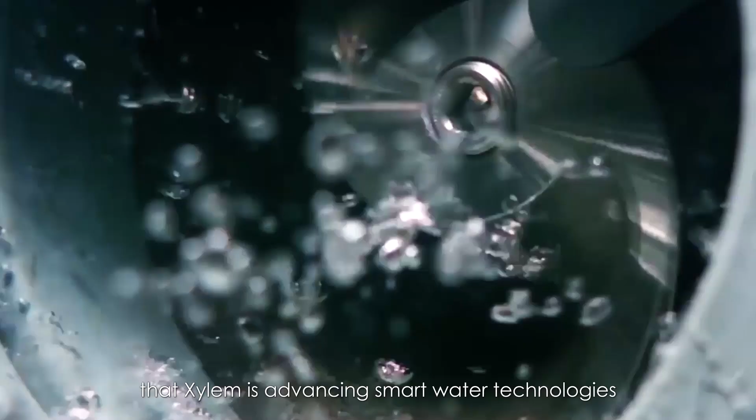As you may have learned from previous digital meetups with Xylem colleagues in other parts of the globe, Xylem is advancing smart water technologies and digital solutions around the world. In China, we have built that into our growth strategy, and we are building local capabilities to help our customers solving water problems through digital transformation and smart water management technology.

To provide customized solutions locally, we have also established an intelligent decision support center in Nanjing. The themes that we mainly focus on in China are water scarcity, the affordability of water, and resilience.

Water scarcity is a big issue in China, especially when China is deepening its urbanization. It has an impact on economic development and people's well-being. With roughly 1/5 of global population residing in China, providing safe drinking water to over 1.4 billion people remains a challenge. About 110 cities in China suffer from water shortage due to different reasons. It is becoming one of the most challenging issues that hinder China's sustainable development.

The second issue is the affordability of water. Many utilities in lower-tier cities don't have the adequate funding to invest in new water infrastructure, which is traditionally very expensive. While aging water infrastructures will impact water quality, which conversely intensifies the water scarcity.

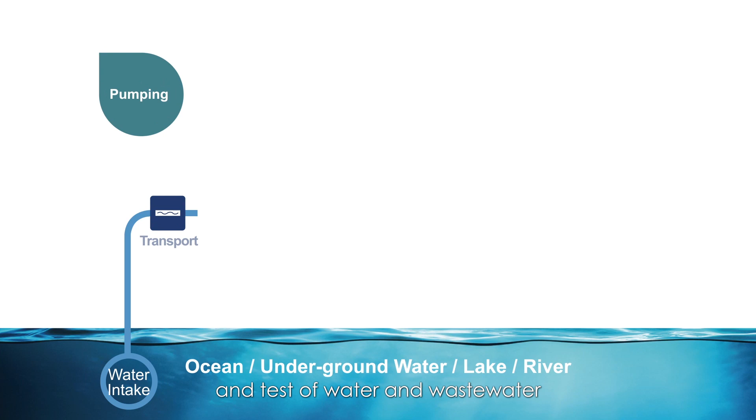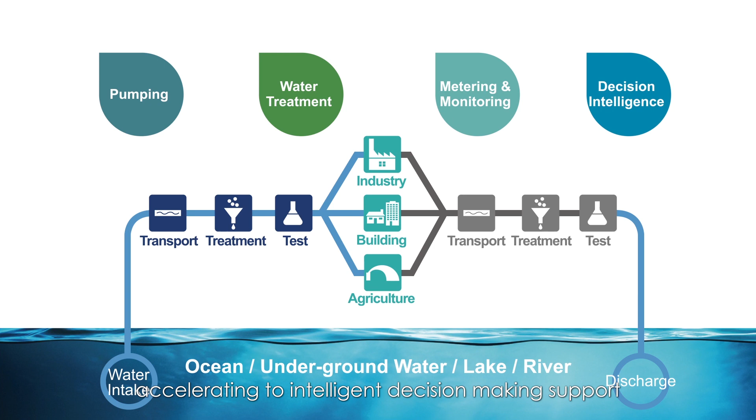Xylem's solutions serve the whole water cycle, from transport, treatment, and test water and wastewater to water application in industrial, commercial, and residential buildings, and in agriculture. Accelerating to intelligent decision-making support for water utilities intended to help utility agencies spend less by making existing infrastructure smarter and more efficient.

Let's welcome Henry Yuan, our sales leader of Advanced Infrastructure Analytics. He will bring us to the newly established Intelligent Decision Support Center in Nanjing and introduce Xylem's smart water technology and our best practices in China.

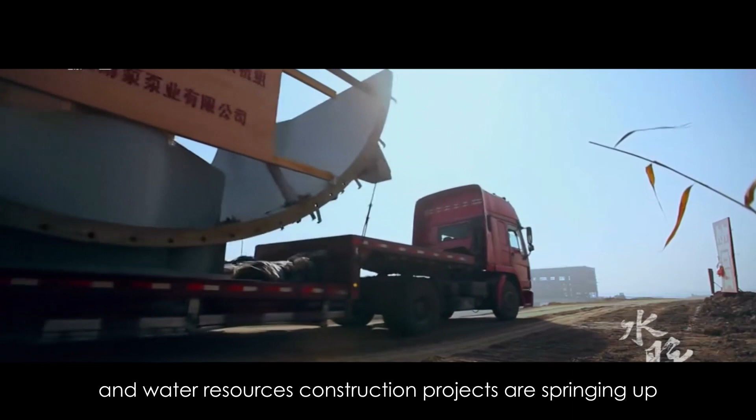China has a vast territory and uneven distribution of water resources. However, with the continuous improvement of urban living standards, the requirement for safe water is increasing. To fulfill the requirement, many super projects, like cross-regional water transport projects and water resources construction projects, are springing up.

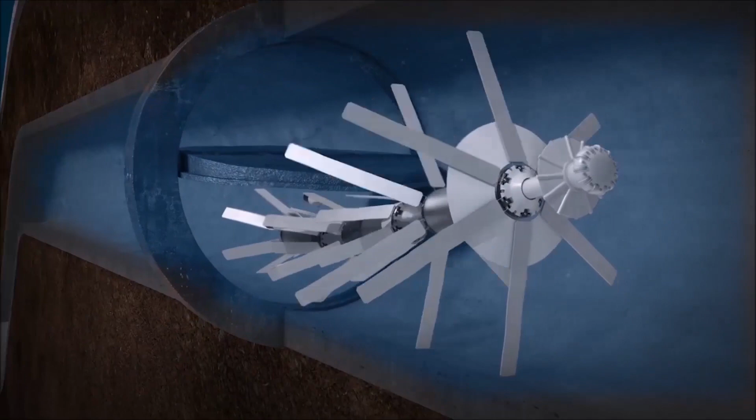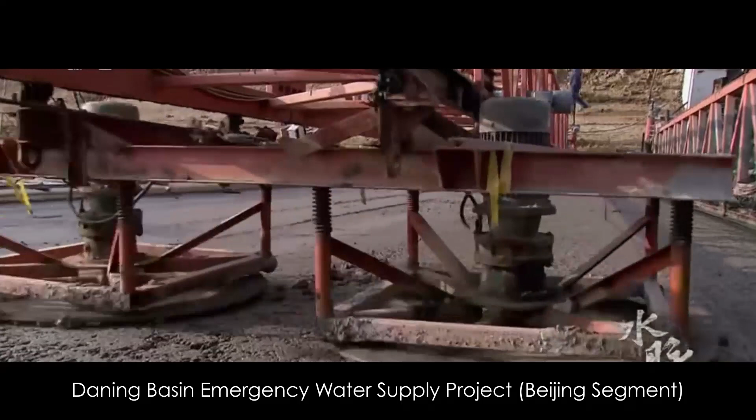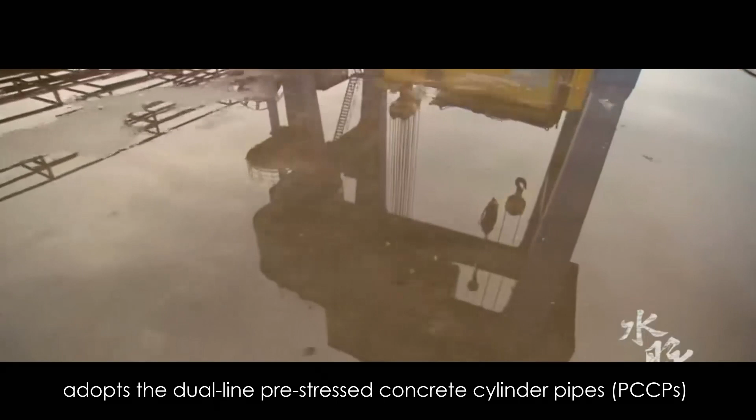The Huinanzhuang Pumping Station, Daning Basin Emergency Water Supply Project, which is located at the Beijing-Shijiazhuang segment of the middle route of the South to North Water Transfer Project, adopts dual-line pre-stressed concrete cylinder pipes of 4-meter diameter with total length of 112 kilometers. Since water transmission started in September 2008, the South to North middle line has already transmitted 4.3 billion cubic meters of water to Beijing.

In 2015, Xylem installed the Xylem Soundprint AFO PCCP wire break safety pre-alarm monitoring system at the tail end of the right loop of the works, which is used to continuously monitor wire breaks in the PCCP, because flow increased to 2.4 meters per second to meet large water demand. The client could receive monitoring results remotely and take countermeasures proactively.

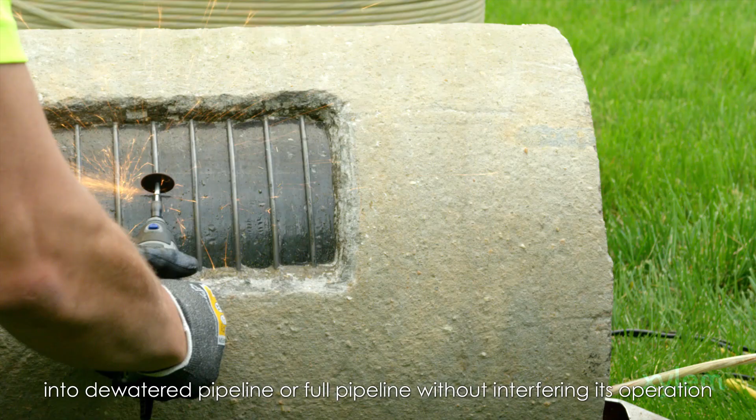SoundPrint AFO system could be installed into dewatered pipeline or full pipeline without interfering its operation. Cables installed in the PCCP could collect real-time data and grasp changes in different operation conditions, then transmit acoustic event to the DAQ.

Those collected data will be filtered and transmitted to the monitoring platform if it is a suspected pipe break. Data analysts could remotely analyze monitoring data with in-field system independently. Based on the monitoring results, our customer could understand PCCP conditions in different phases or formulate maintenance plans for repairing

and replacing pipe. With further investigation on the PCCP condition and AFO results, Xylem's intelligent solution could offer customers data-driven advice on important infrastructure management, securing stable and safe operation of such significant works.

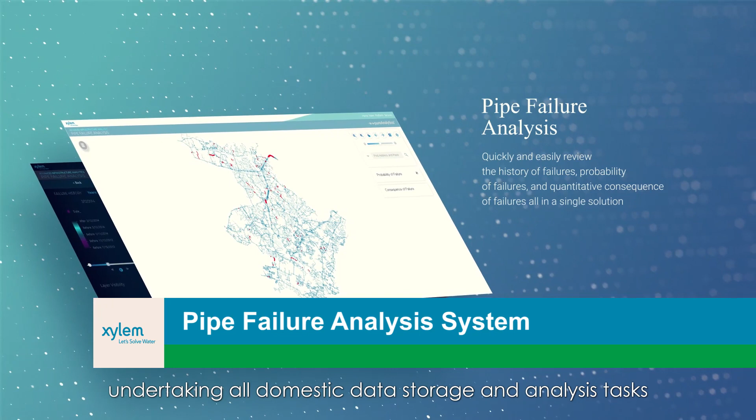In Nanjing, we set up Xylem Intelligent Decision Support Center, which will support the development of Xylem's intelligent decision solution in China by establishing a data storage and analysis platform, undertaking all domestic data storage and analysis tasks, and realizing the monitoring and optimization of pipe network and water assets.

If any of you come to China in the future, welcome to visit our Nanjing Intelligence Center.

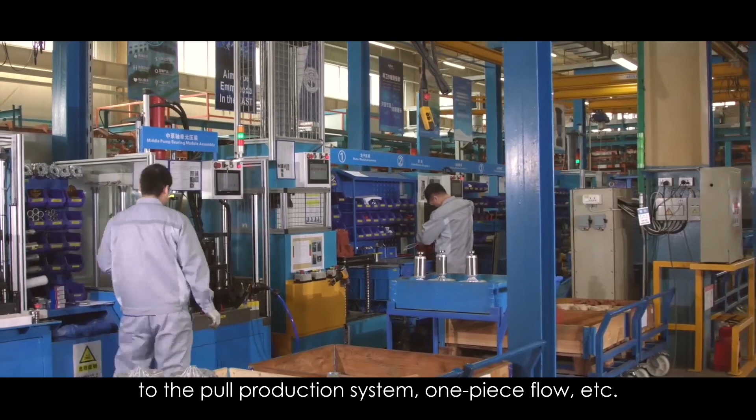As the world's leading water technology supplier, Xylem is committed to water protection and reclamation, implementing the philosophy of every drop counts with innovative water technology solutions.

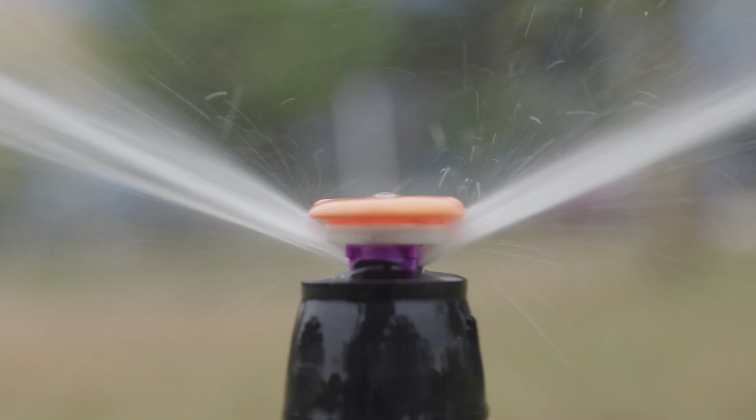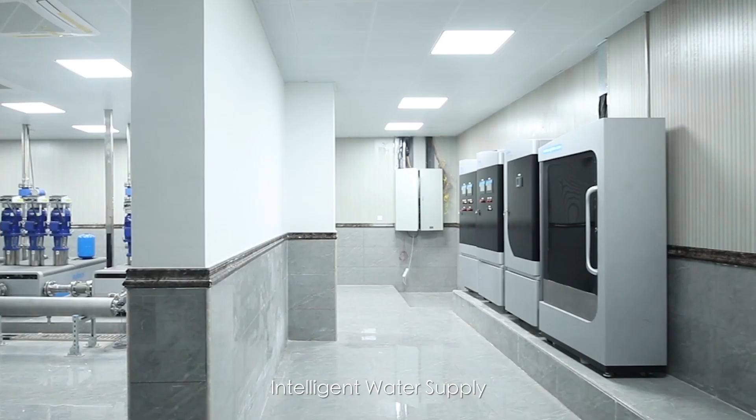The construction of the omnidirectional self-supply water circulation system made undeniable contributions to Nanjing Garden Factory. The system combined with access control and security protection, video surveillance, intelligent water supply and remote control, integrated intelligent pump house, along with various sophisticated equipment of Xylem, secures the safety of clean water for the community.

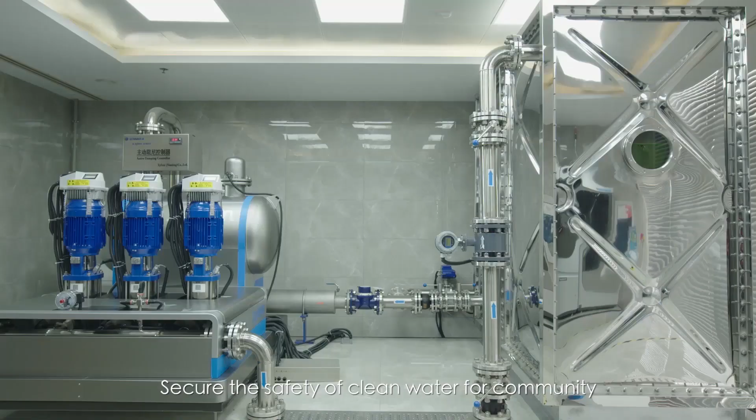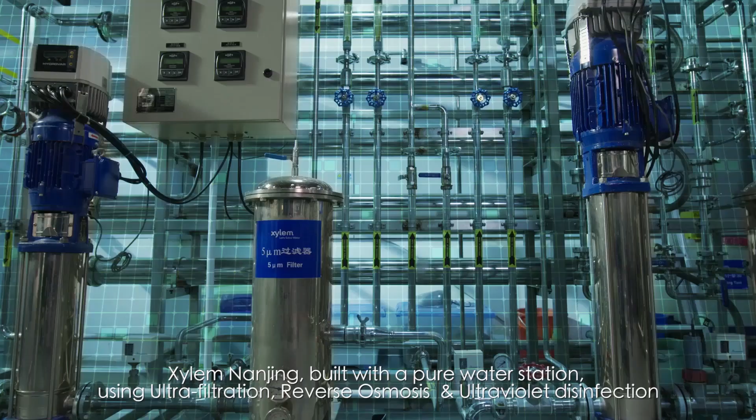Xylem Nanjing built a pure water station using ultrafiltration, reverse osmosis, and ultraviolet disinfection, ensuring everyone here has access to safe and clean water. With continuous exploration and proactive innovation, employees of Xylem Nanjing approach new targets on the way to intelligent manufacturing and sustainability.

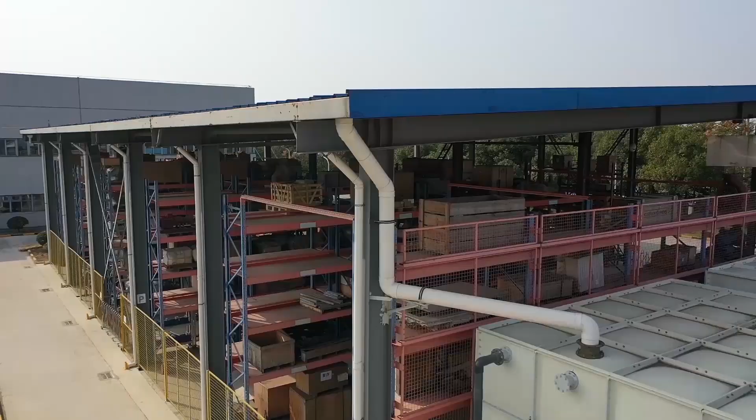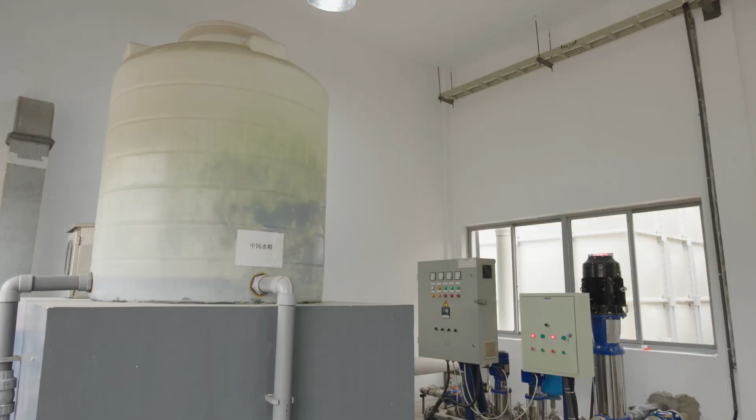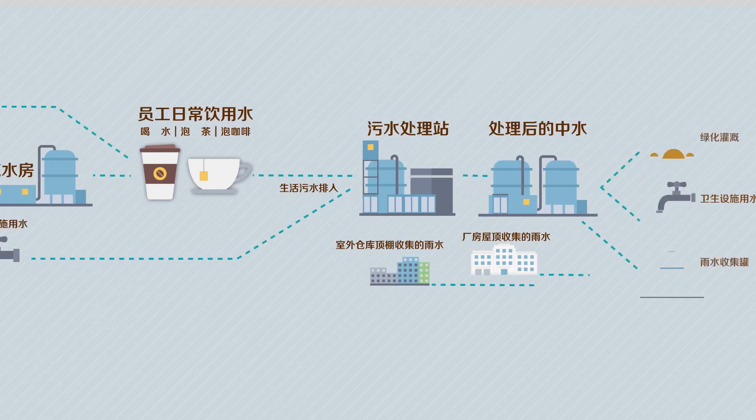Rainwater collection for irrigation. Sewage treatment for water recycling. Water circulation is used throughout Xylem Nanjing.

Facing the world's water scarcity, Nanjing plant starts from herself. Never forget why we start, and move forward bravely.

Watermark activities are carried out everywhere - in schools, in scenic spots, in parks, in our plants - everywhere with our environmental footprints. Water, origin of Xylem dreams, touches the heart of our purpose. We believe Drive to Green is a good choice in Xylem Nanjing for our commitment to the world.

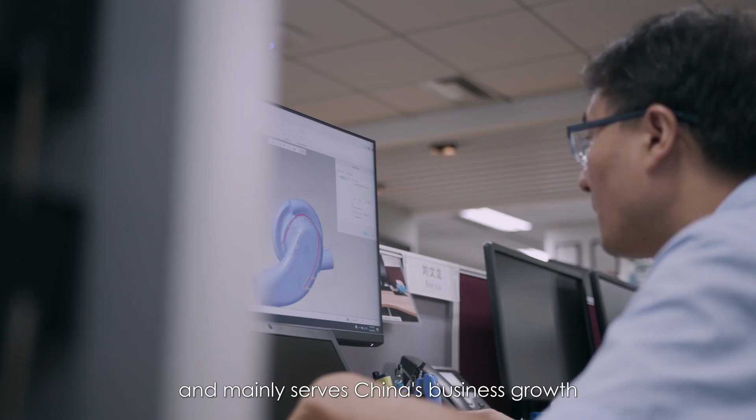Our RDE Center is rooted in China and mainly serves China's business growth. It cooperates more closely with the local market and sales. Its main functions include

new product development for the local market, introduction and localization of new products from other GCs, enhancing competitiveness and capability of local products through value engineering, execution of water treatment projects including design, drawing, and field commissioning, controlling new product development processes, managing product safety and local patents, and providing technical support for customized orders and quality issues.

After several years of development, we now have more than 50 engineers, compared with less than 20 people at the beginning.

Our RDE center is divided into 4 teams: pump and mechanical design team, electrical and software development team, package solution development team, and wastewater treatment process development team.

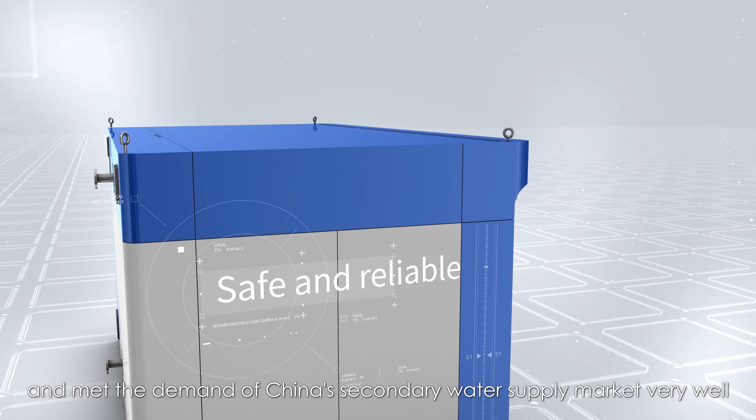Another successful example is the intelligent pump house we launched last year, which met the demand of China's secondary water supply market very well. We achieved a sales amount of nearly $2 million and won the Xylem Emerging Market Product Innovation Award. Next, I would like to introduce RDE Manager Mr. Chen Mi, who is the leader for intelligent pump house development, to give you more introduction about this new product.

Hello everyone, my name is Mi Chen, Development Manager from China RDE. Today I'm going to take a few minutes to show you an exciting product we have developed in China. It is what we call the intelligent pump house.

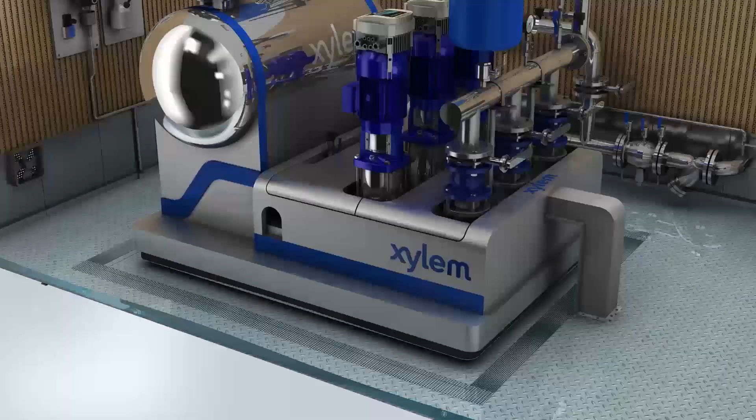Traditionally, the pump house in China was owned by a property developer. It posed many issues, such as unstable water pressure, lack of maintenance, and low energy efficiency of pumps.

Starting in the year 2018, the China government decided to transfer the ownership of the pump house from property developers to state-owned water groups. It was at that time we immediately identified that it could be the opportunity for us to work with our new client with something that could be beneficial to them.

We then set up a project team to work closely with our potential client, having a deep understanding of their needs, how they want to operate and manage the pump house, what their ideal pump house would look like, and what challenges they are facing.

With valuable information collected from the voice of the customer, we then started to look for various solutions for our engineering design. In just several months, we managed to have our first prototype ready with well-considered key differentiators. I will name a couple of them here.

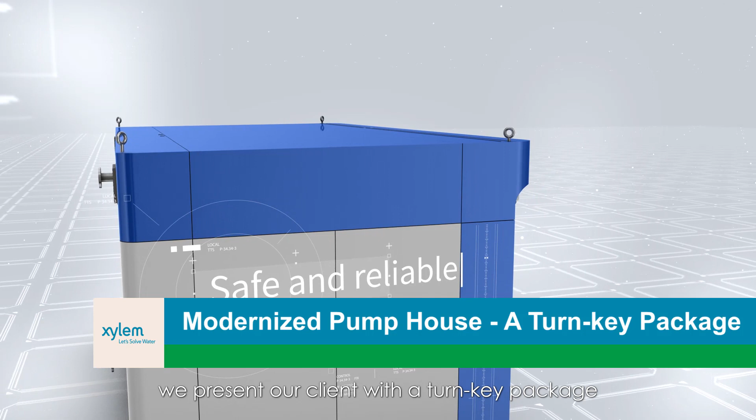Firstly, apart from our traditional equipment and pump selling, we present our client with a turnkey package. That's everything they will need for a modernized pump house.

It consists of 6 standardized modules, including pressure booster, water tank, security system, water quality monitoring system, and UV disinfection systems. It could be all in a concrete building or in a containerized tank, depending on the footprint of the specific job site.

Secondly, we turned the traditional pump house into an intelligent one by embedding the newest technology. For instance, the booster comes with our newly developed control algorithms. To achieve better energy saving, smart sensors are used to collect the equipment status.

Those data are digitalized through an edge computer device and further transferred to our cloud-based pumping platform through IoT and 4G technology. From there, the operator is able to monitor all the equipment of the pump house through their cell phone remotely, which makes their life a lot easier, especially during the pandemic period.

Furthermore, based on the data we have collected, we build our database and a scoring system to help clients evaluate if their pump house is operating in the optimized situation, and provide them with our technical recommendations. As soon as this product was released, it quickly got our clients' attention and has been installed in many of our residential buildings across the country to deliver residents with clean and safe water.